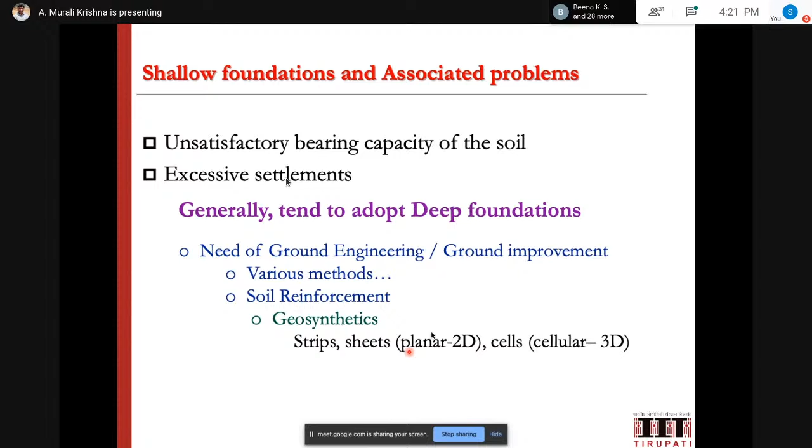We can see several instances in many places where soil reinforcement geosynthetics are being applied. When you talk about geosynthetics, there are different types: strip type reinforcement, sheet type reinforcement, and cellular type or 3D reinforcements.

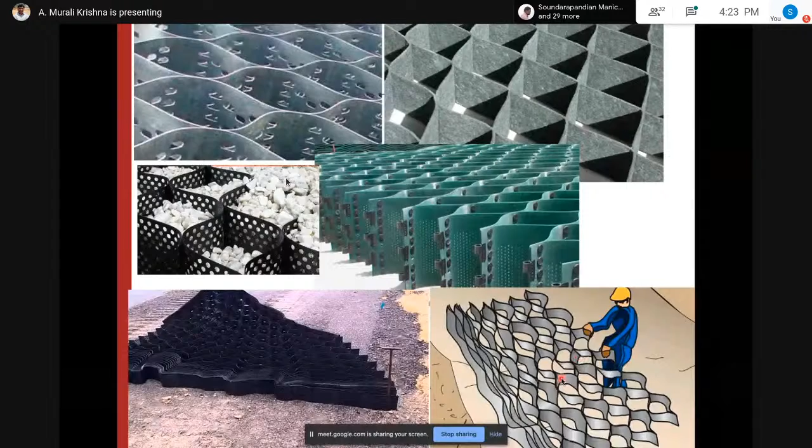These geocells can be brought to the site in a very collapsed form, which can then be extended and opened up, and filled with material to proceed with the construction.

Geocells can also be prepared using geogrid material like this one - these are unfilled ones that were prepared. This geocell is factory-made, directly bought and placed. These two, and the top two, are prepared on site.

The advantage of on-site preparation is that geocells can be prepared to any different sizes, particularly when we need to use them for very large areas. However, in the context of shallow foundations, mostly the readily available geocells would suffice the requirement.

Now, when we adopt reinforcing the foundation, what are the various options if you want to modify the foundations? Let us see here. Let us take a ground.

Hypothetically, I am taking a case of homogeneous clay or homogeneous ground. However, in practice, reality, the ground is not homogeneous - there are certain things that would be there. Another hypothetical case taken here is the surface foundation, otherwise generally we will be embedding the foundation to some depth - that is the practical thing. However, here, the homogeneous soil case and the foundation resting on the surface has been taken.

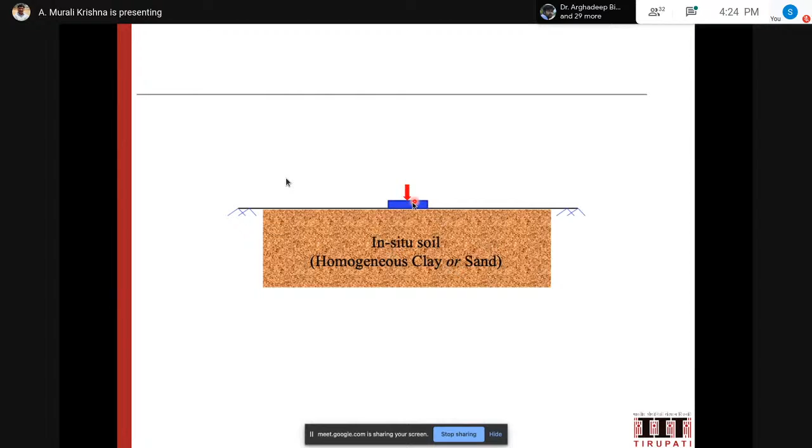Yes, this foundation soil system has some problem, and we need to improve the capacity. One option would be taking the top few meters or few centimeters of the soil and replacing it with other good quality soil, generally sand or other cohesionless material, or sometimes M sand or quarry dust. These can also be used to fill the top part of the soil.

So this can be a layered configuration and unreinforced, basically with no other reinforcement placed here. This is one type of configuration one can adopt to improve the capacity of the soil.

Otherwise, we can also include some layer of reinforcement in between at the interface, a single layer, or we can use multiple layers of reinforcement starting from the top to the bottom of the footing, coming down to the interface also. That is what more practically can be considered. But in this case, we are taking one planar reinforcement at the interface between the two materials as one option. The next option is to

use the three-dimensional geosynthetic material in the form of geocell, placing it directly at the interface. This is one more option one can consider for getting the advantage in the foundation.

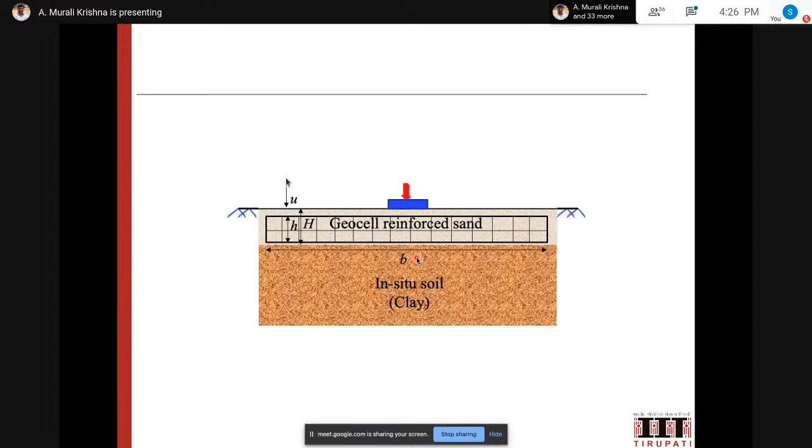Here, certain parameters are involved. So U is the top depth of the geocell from the surface, and small h is the thickness of the geocell. Capital H is the total thickness of the sand layer, the geocell reinforced sand thickness, and small b represents the total width of the foundation, which can be in proportion to the footing.

Another option is keeping the geogrid at the interface and placing the geocell over this geogrid. So these are various options one can adopt for improving the capacity of shallow foundations using different forms of geosynthetic reinforcement.

To observe the performance of these different model studies, experimental studies were conducted by Biswas, Arghadeep Biswas, who defended his thesis in 2016. A very thorough study has been done considering different types of subgrade soils, having undrained shear strength values of 7, 15, 30, and 60 kPa, and also a uniform sand of relative density 80%, with different reinforcing foundation configurations as discussed previously.

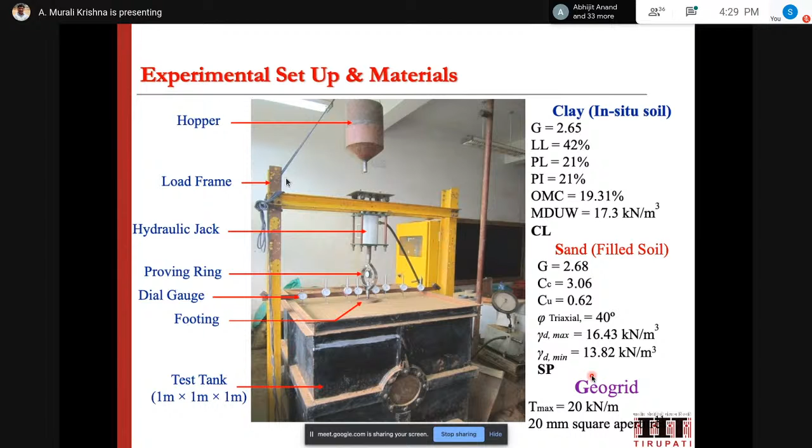As we saw earlier, the various materials used in the study were clay, having these properties, prepared at different undrained shear strength CU values, and sand material having these properties, prepared at 80% relative density. Geogrid was used as the geosynthetic material, used as planar reinforcement horizontally, and the same geogrid was also used to prepare the geocells, forming a three-dimensional geosynthetic material.

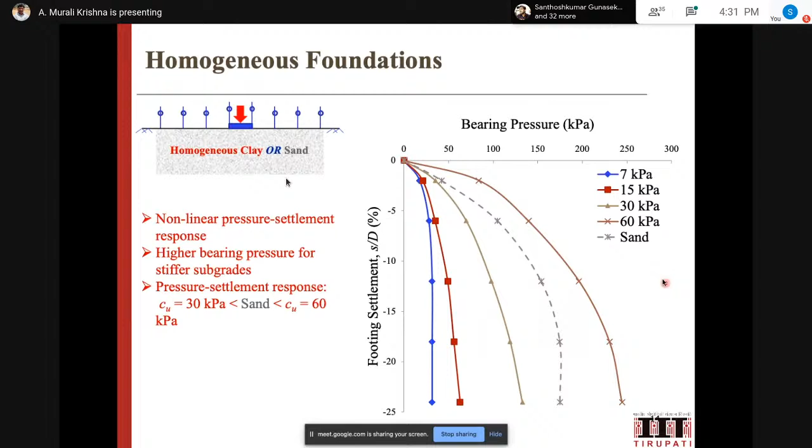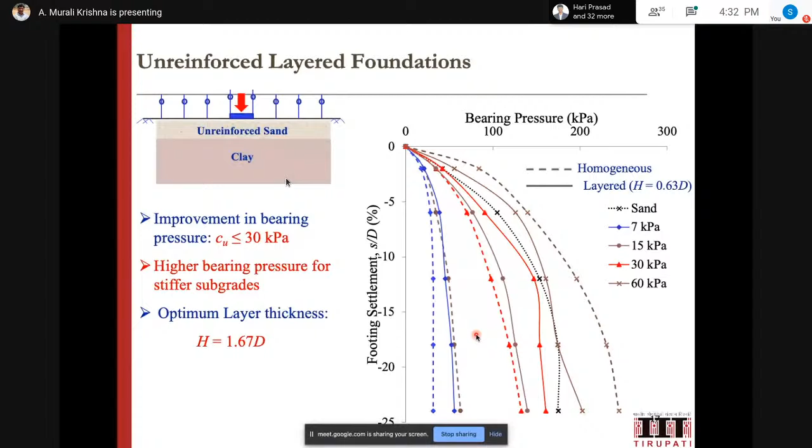Among these, we can clearly identify the increase in capacity for the very soft subgrade, here 7 kPa, and also for the 15 kPa subgrade significantly. The 15 kilopascal subgrade with the layered simple unreinforced sand has significantly contributed to the increase in bearing capacity. So these are some other heights of the sand layers.

However, for the 15 kilopascal case, even a nominal small thickness layer of 0.63 times the diameter also significantly increased the capacity, and further not much change up to about 12% settlement we can see here. This is one observation we can see. So what we can see is in moderately soft to medium stiff soils, even keeping a small layer of sand will significantly improve the bearing capacity.

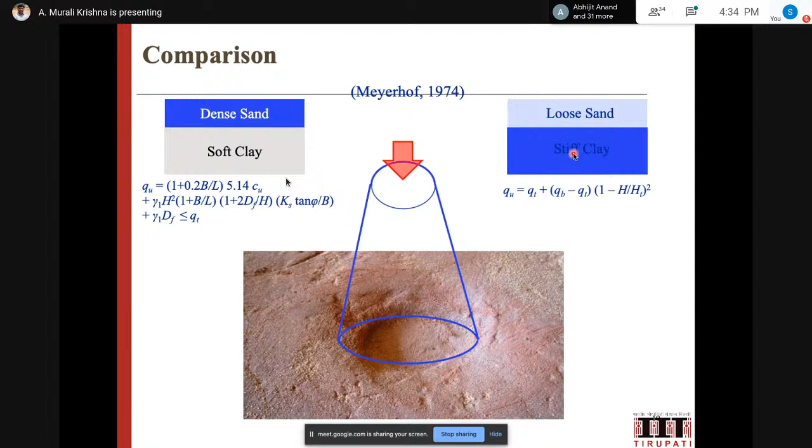Whereas in the other category, the top layer is loose sand compared to the stiff clay at the bottom. Loose sand here means it is relatively softer compared to the soil capacity, not actually loose. Using these equations, the foundation bearing capacities have been evaluated, and these are also reasonably comparable with the theoretical calculations.

So the next category of reinforcement is the geogrid reinforced category, which is one layer of geogrid placed at the interface, and keeping the same height of sand layers from 0.63 to 2.19, various tests have been done.

This is the unreinforced condition, meaning sand has been placed here but without reinforcement. With reinforcement, the capacity has been increased at 0.63 times the diameter depth. This is the significant improvement we can see here. The difference between these two lines clearly shows the contribution of the geogrid reinforcement in enhancing the reinforced foundation capacity.

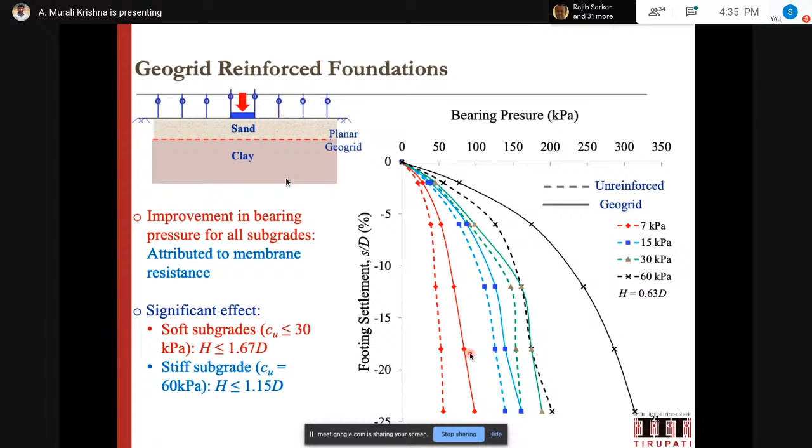This figure shows results for various Cu values, for example Cu 7 kPa, even Cu 60 kPa, with the sand bed and also the geogrid reinforcement at the interface. We can see significant improvement in the bearing capacity. Just to draw your attention here, even the very stiff subgrade of 60 kilopascals strength could get improvement when we use the geogrid at the interface. We can see that improvement also can be obtained.

The reinforcement mechanism in this case can be explained with reference to the membrane effect, which has been reported earlier by Love et al. and various other researchers who conducted studies. You can see here the depression penetration into the subgrade is minimized with the use of this geogrid. Using the theory proposed by Love et al., the capacity of the reinforced foundation is evaluated, which is also compared in this figure, and they match reasonably well.

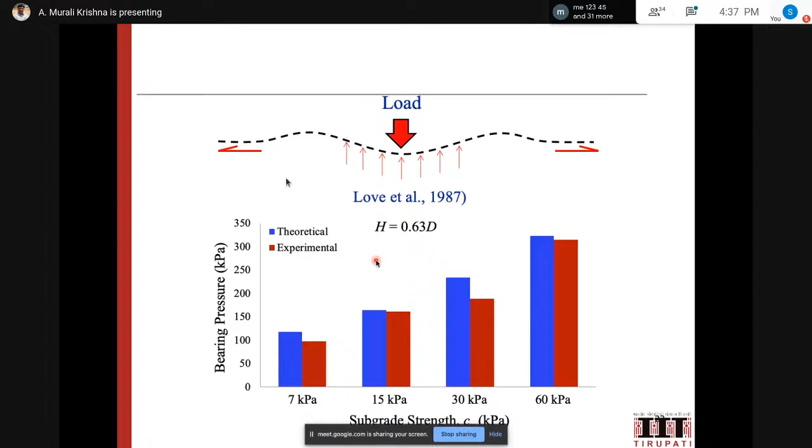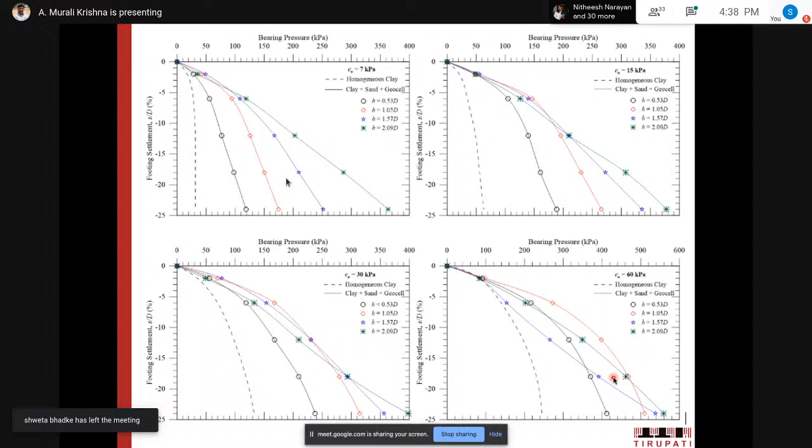For example, if you take the very soft clay subgrade, CU 7 kPa, the capacity has been increased many fold. Even in the case of the very stiff subgrade, using the geocell, a very significant improvement of almost 3 to 4 folds can easily be seen in this particular figure.

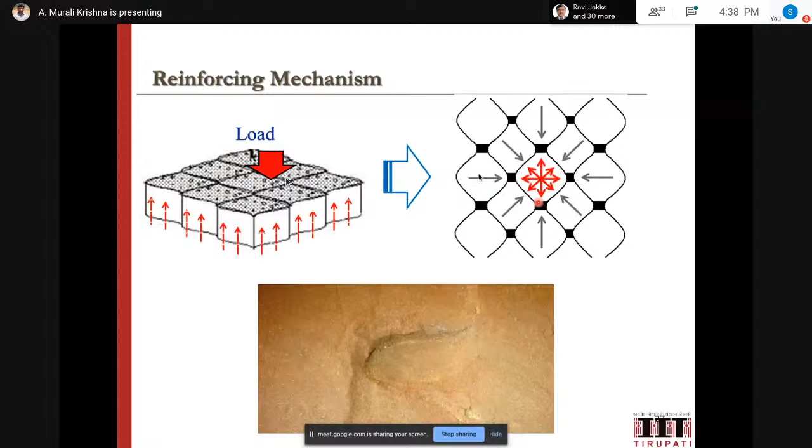The reason for the improvement and the mechanism are shown in this figure. Various mechanisms act together: the interaction between the soil and vertical walls of the geocell is one aspect, and the confinement of the geocell provides more resistance to the soil. Also, the membrane effect has been shown as a beam-like mechanism, where the whole geocell acts as a beam.

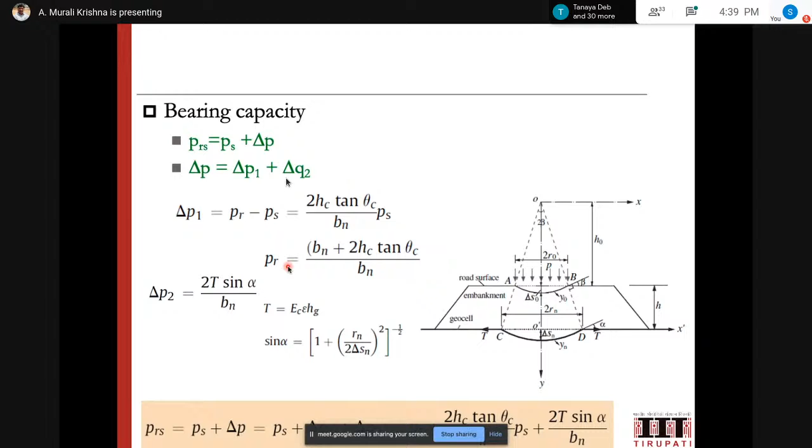So quantifying these effects analytically for calculating the bearing capacity, the studies by Zhang et al. significantly provided contributions and gave the formulations to calculate the bearing capacity, as shown in this figure, which can be used to calculate the capacity of the geocell reinforced foundation system.

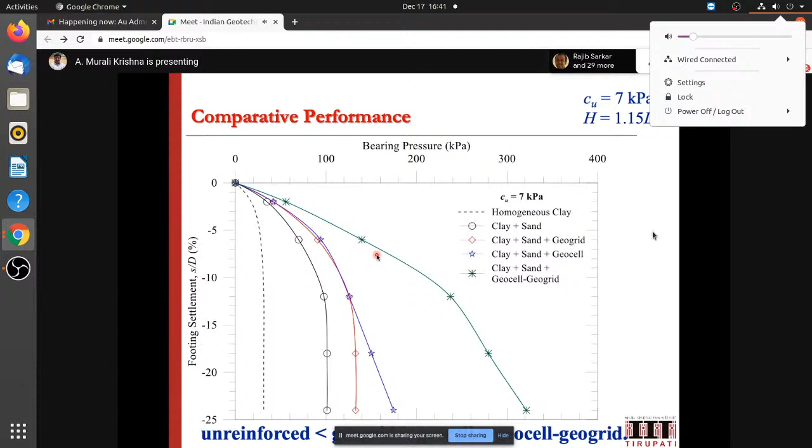For example, CU of 7 kPa, a very soft subgrade, has been taken, with H value of 1.15D, and different reinforcing configurations can be seen. This is homogeneous clay at the bottom, and this is only clay and sand. Even here you get significant improvement.

So only providing geocell or geogrid reinforcement directly on the sand could not make much difference up to 12% settlement. However, providing the geogrid and geocell together from the start of settlement significantly improved the performance. This is an important observation showing the superiority of this level of reinforcement. With geocell and geogrid together, you get significant improvement at all settlement levels.

On the other hand, for the other class of subgrade, 30 kilopascals, there is a significant increase beyond 6% settlement. So you could get the significant advantage of various forms of reinforcement clearly defined. This shows how performance can be improved as per requirement, depending on the subgrade strength of the soil.

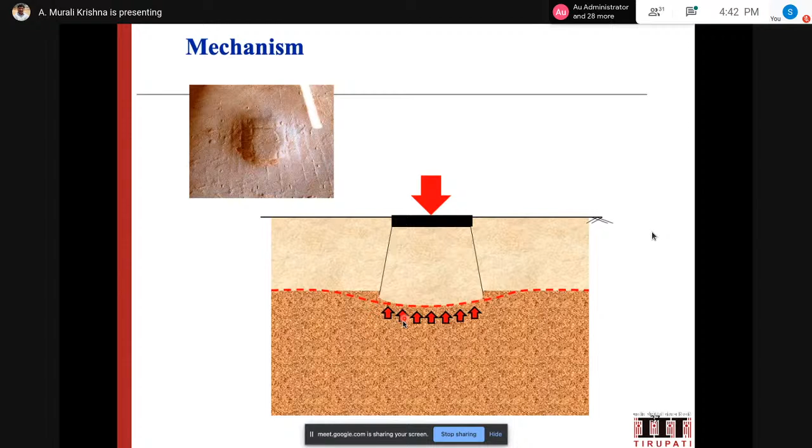Just to recall the various mechanisms altogether: in the layered configuration, you will have this type of behavior, and the depression and penetration can be expected at this level. These are particularly presented for the soft subgrade. If you provide geosynthetic reinforcement, you get the membrane effect, and penetration into the bottom soil can be minimized, giving more performance.

Next, using geocell reinforcement, you see all the mechanisms like membrane effect, beam-like mechanism, and confinement effects being used effectively. When you provide bottom reinforcement, it interlocks with the geogrid system, and there will be locking between the geocell and geogrid as well, giving much more improved performance. This is the interlocking mechanism that can be seen here.

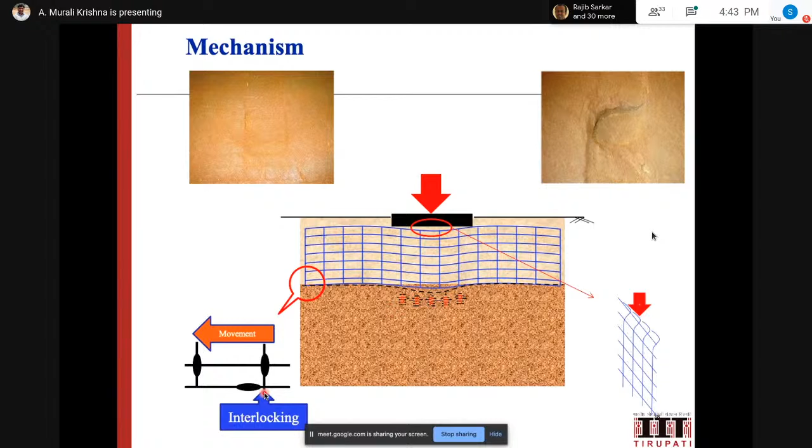So depending on the contributions, one can see different levels of improvement in the shallow reinforced systems. With that, I am coming to the concluding remarks.

This study showed geosynthetic reinforcement in any form is very effective in enhancing the foundation capacity. We can note that the geocell-geogrid combination provided the higher performance, with geogrid being the lowest among the reinforced configurations. In fact, unreinforced layered configuration also could improve the bearing capacity of the system. Overall, the whole improvement depends on the level of the footing settlement, the layer thickness we keep over the in-situ soil, and the strength of the subgrade in-situ soil.

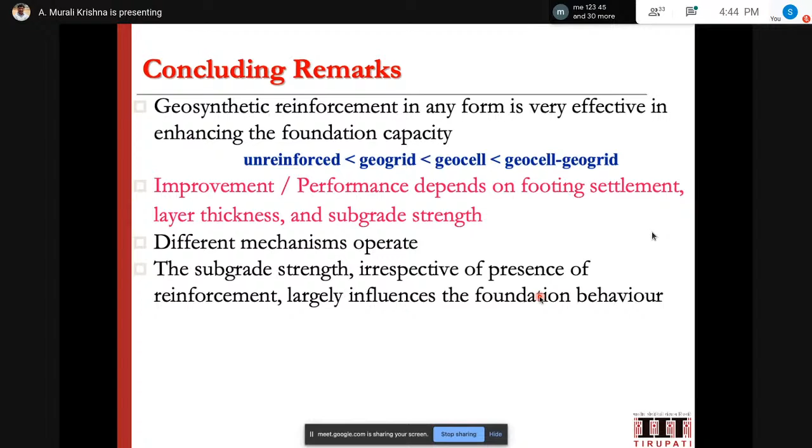It is to be noticed that improvement levels decreased with the increase in subgrade strength. However, in relative values, even stiffer subgrades having the reinforcement could contribute much improved bearing capacity. Considering all this improved performance, one should note that reinforced shallow foundations may provide an alternative solution to deep foundations under certain circumstances. It is not necessary to go for deep foundations if some of the performance requirements are not satisfying.

Using geosynthetic reinforced foundation under shallow conditions itself, we can meet the requirements. So with this, I thank you all for your patient learning. Thank you.

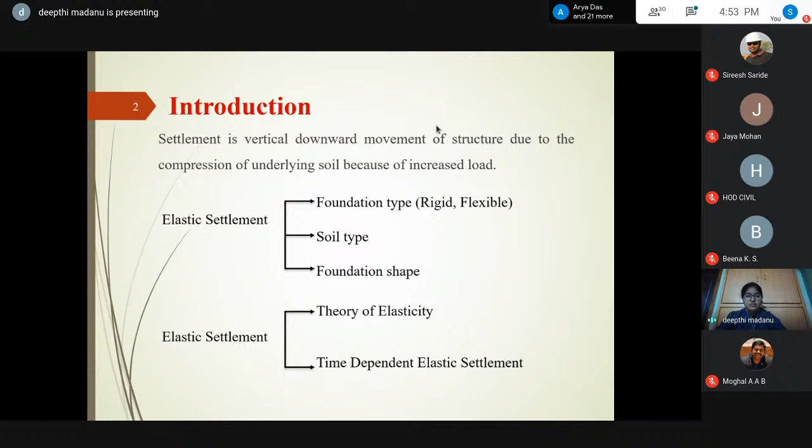The methodology is to find the settlement using the Schmertmann et al. method, and the Burland and Burbidge method, and to find the variability in settlements of soil considering three sizes of footing - 2, 4 and 10 meters - for a pressure of 100 kPa, and to define the suitable method for a given soil profile.

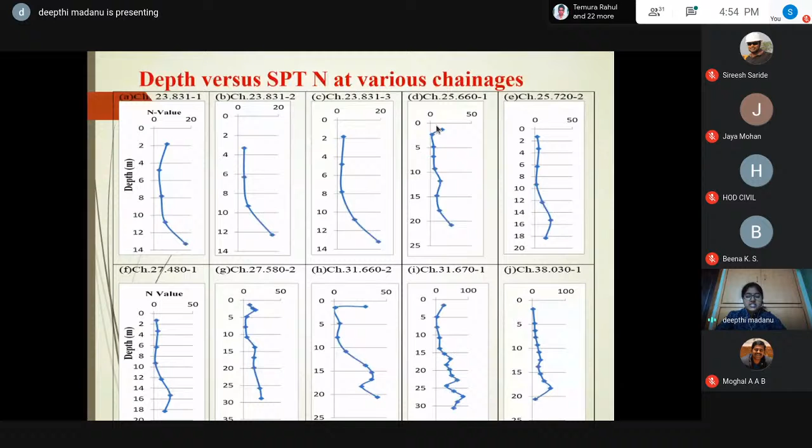I have considered the geotechnical investigation report at Dankuni Kharagpur section, which comprises 23 chainages. This is the borelog showing variation of SPT-N at various chainages. We can see the variation is constant up to a certain depth and then increases with depth, and for some other chainages it increases and decreases with depth.

The Schmertmann method is developed using strain measurements from literature and the theoretical solution of Ahlvin and Ulery, along with FEM analysis, to obtain the strain distribution triangle method. The formula to find settlement is C1 C2 Q sigma IZ by ES into ZI. Coming to the Burland and Burbidge method, it is developed based upon regression analysis of around 200 case histories.

First, to find the settlement, depth of influence needs to be determined. That depends upon whether the variation of SPT-N is increasing or decreasing with depth. If increasing, we can use case 1, that is Z dash equals 1.4B divided by B_R, power 0.75 into B_R. If decreasing with depth, then Z dash equals 2B or Z double dash, where Z double dash is the soft layer depth. Whichever is smaller, we use that condition.

The formula to find settlement is alpha 1, alpha 2, alpha 3, shape factor, width factor, and pressure factor, multiplied with reference width.

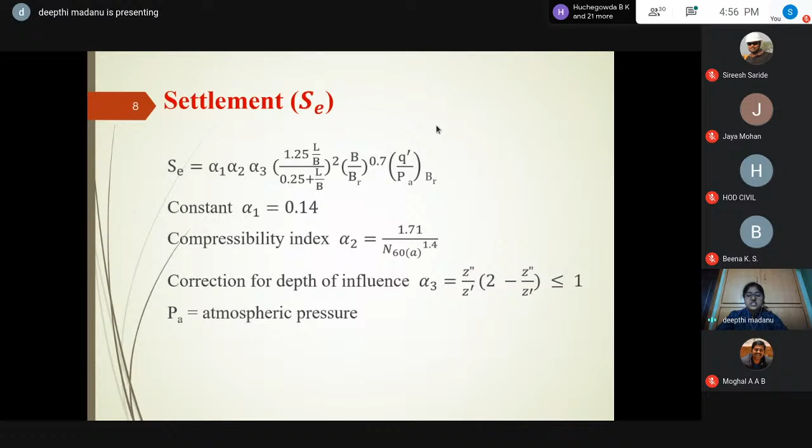These are Schmertmann's results. Based upon the deformation modulus, it is divided into different layers. These are the thickness of each layer and the SPT-N of that particular layer. After converting to qc, the relation I have used is 2N. Since the soil present is silty clay, to further convert to deformation modulus, I have used the relation 2.5 qc.

This is the strain influence factor at the center of each layer, and this is the ratio of influence factor to deformation modulus multiplied with the thickness. The summation of all layers, multiplied with depth correction factor and creep correction factor, gives the final settlement. This is for 2 meter footing width. Similarly, for 4 and 10 meter footing widths, these are the settlements.

Coming to Burland and Burbidge method, if the soil profile is not uniform, that is, if variation is increasing and decreasing with depth, it is difficult to finalize which case to consider. So what I have done is...

Can you rush to your conclusions please? We are running short on time.

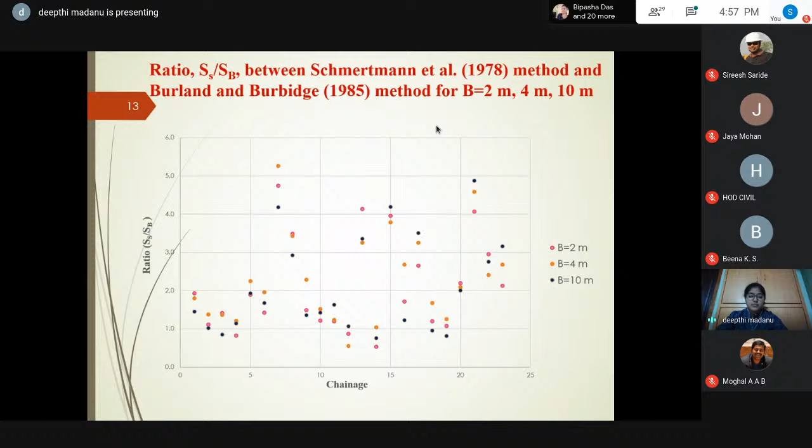So this is the graph obtained by considering various ratios at various stratas. We can see the ratio is greater than 1 at some stratas and shows a peak value greater than 3, because at these stratas SPT-N value is greater than 15, which implies higher values of N give higher settlements in Schmertmann's method. But in Burland and Burbidge method, higher values of N get averaged and predict lesser settlements. The ratio shows less than 1 at profiles where SPT-N value is very low, around 3 to 1, which implies smaller values of N do not affect Schmertmann's method, but are reflected in Burland and Burbidge method and give more settlements.

In general, Schmertmann's settlements are higher than Burland and Burbidge settlements. For footing width less than 4 meters, Burland and Burbidge method is more suitable if the soil profile is not uniform, and for footing width greater than 4 meters, Schmertmann's method is more suitable. The ratio shows a variation of up to 3 for stiff strata at shallow depths, and the ratio shows less than 1 for soft strata whose SPT-N value is less than 3.

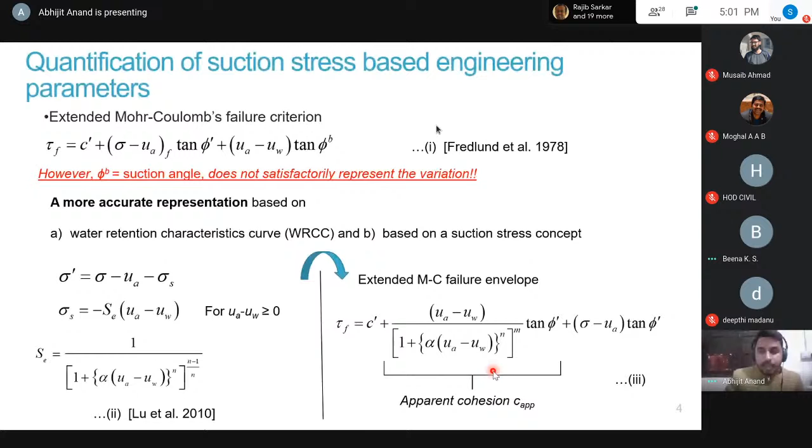Going further, when a steady state infiltration is taking place in the vertical direction, like infiltration or evaporation, the matric suction variation with depth does not remain constant. So what has been done in the present study is that the variation of this matric suction with depth has been incorporated by assuming a steady state infiltration rate ratio, which can be quantified as Q by Ks, where Ks is saturated hydraulic conductivity and Q is the magnitude of surface flux.

Once we are considering this steady state surface flux condition, the apparent cohesion does not remain constant. It becomes a function of depth and effective saturation. This saturation is a function of depth since effective unit weight is a function of degree of saturation, so it also does not remain constant. It becomes a function of depth. So in equations 5 and 6, you can see that the apparent cohesion is not constant. It is a function of the infiltration rate ratio and the depth, and similarly for effective unit weight as well.

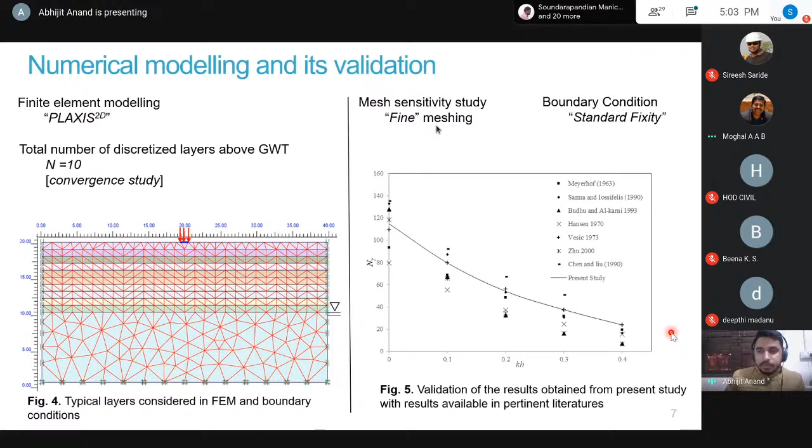Now coming back to the deterministic bearing capacity analysis, the seismic bearing capacity has been defined in terms of a dimensionless ratio. It is basically bearing capacity to gamma B, and analysis has been carried out considering 5 different infiltration rate ratios and 5 different horizontal seismic acceleration coefficient values.

Last minute. Yes, sir.

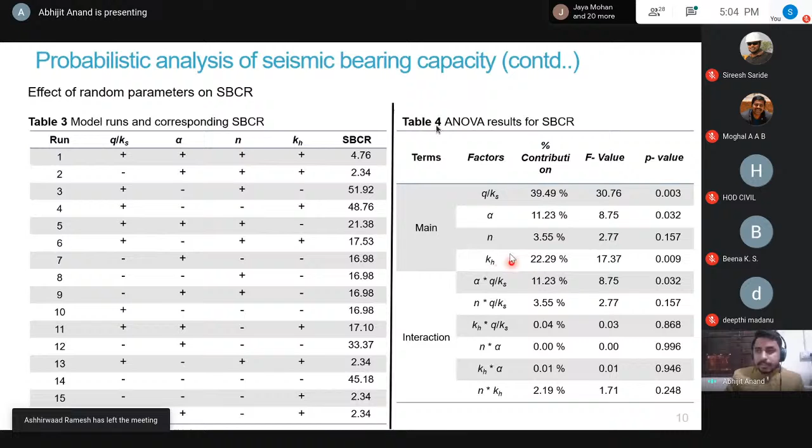Based on the uncertainty of the parameters, these are the ANOVA results. The point which is noteworthy here is that the factor infiltration rate ratio has a 40% percentage contribution, and the seismic acceleration coefficient value has 22% contribution on the overall seismic bearing capacity ratio.

It is a much more accurate representation of SBCR, seismic bearing capacity ratio, and the unsaturated fitting parameters like alpha and n have also been incorporated in the analysis.

Now, to conclude, the first and major highlight of the present study is that matric suction substantially affects the seismic bearing capacity ratio under one-dimensional steady state surface flux boundary condition. This has been the major outcome of this particular presented study.

Under deterministic analysis, the reduction of SBCR with KH is a very obvious result - the seismic bearing capacity was found to be reducing with increasing KH value.

However, among all the random input parameters, Q by KS was found to have the highest contribution to the seismic bearing capacity ratio. Also, the water retention characteristic parameters alpha and n had comparatively lesser contribution to the overall seismic bearing capacity ratio.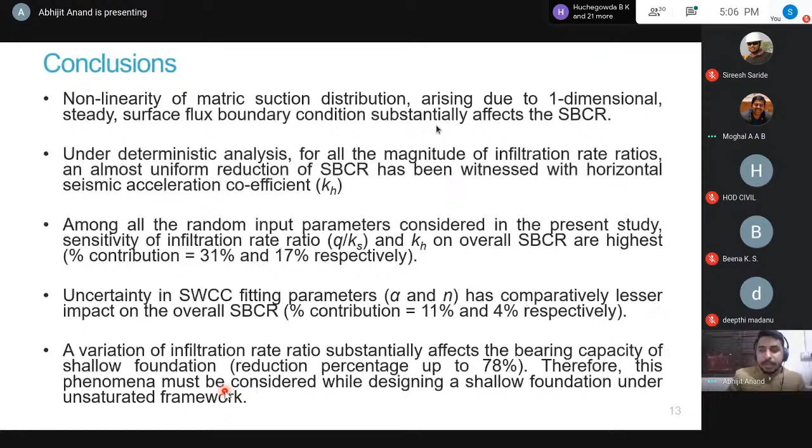And finally, to conclude my presentation, it has been found out that Q by KS has a substantial effect on the bearing capacity and has to be considered while designing a shallow foundation. These are the findings. Thank you.

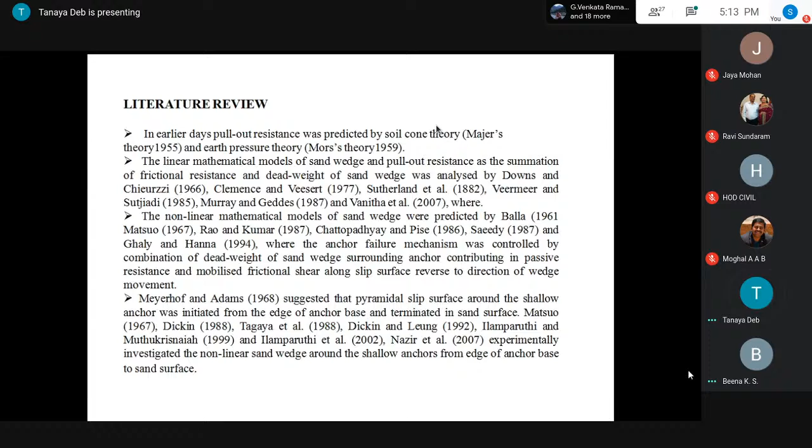This is the presentation of 1G 2D bell anchor panel under vertical pull in dyed and non-dyed dry sand deposit.

A 2D bell anchor panel possessing a bell angle base alpha, base diameter dB, and shaft diameter ds is embedded in dyed and non-dyed dry sand deposits. Under vertical pull, as applied stresses act along the vertical plane of the panel, a couple of symmetric non-linear failure surfaces are formed on both sides of each panel. These failure surfaces are generated from the anchor base and terminate at the sand surface.

For mathematical realization, these slip surfaces can be interpreted as three-dimensional axisymmetric failure surfaces in the same scale. Here, the intention is to find out the value of predicted pull-out capacity.

This study attempts to investigate the predicted values of pull-out resistance, ratio of mobilized frictional shear to pull-out resistance, and ratio of dead weight of sand to pull-out resistance of bell anchors on account of variation in embedment ratios, diameter ratios, and bell angles.

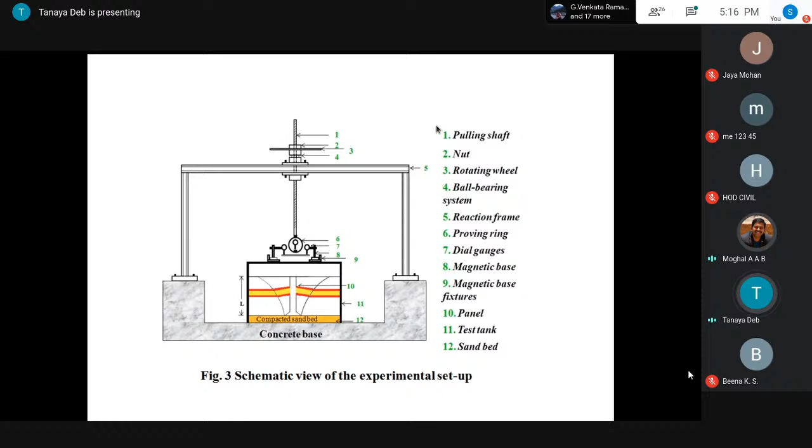This is the presentation of failure surface on both sides of the panel, and this is the total mathematical process. From here I can draw the conclusion: with the increase of embedment ratio, pull-out resistance is gradually increased.

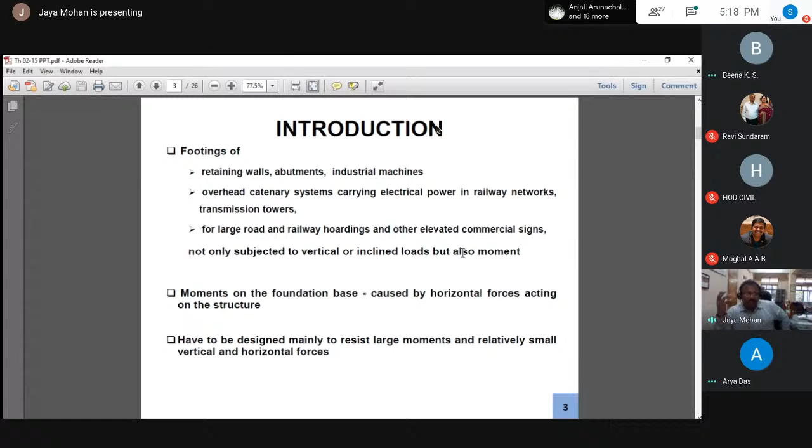Now coming to the introduction, you see some foundations. Usually we are aware of foundations which resist vertical loads. But in certain structures, rather than vertical loads, moments will be the deciding criteria. Compared to vertical loads, moments will be much larger, as in the case of foundations for transmission towers or foundations for retaining walls, etc.

In this research, we are trying to find out the influence of moment on the load settlement behavior of a foundation. Usually wherever in the foundation moments are the deciding criteria, the type of foundation provided may be either a short pier foundation or a pile foundation. These type of foundations are quite costly.

So we are trying to find out the influence of moment on the load settlement behavior of a shallow foundation, and also on various geometric parameters. So these are the objectives: influence of moment on the load settlement behavior, influence of depth of foundation on the rotation of footing, and influence of vertical load on the foundation on the rotation of footing. Also, if you provide a reinforced foundation bed, how much improvement we can achieve. These are our research objectives.

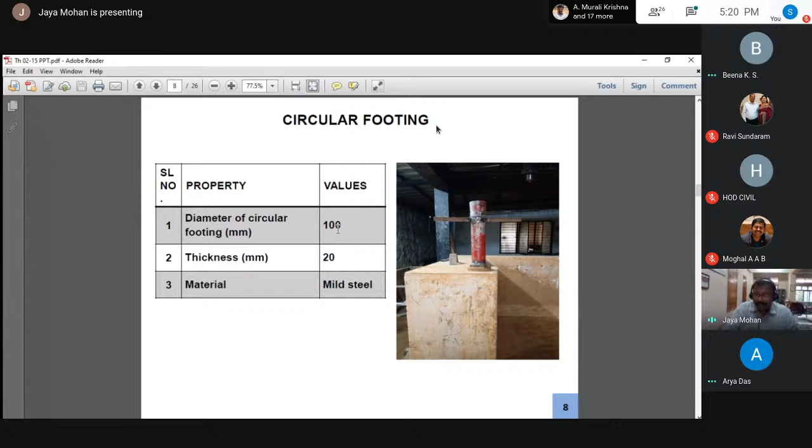This is a circular footing, and this is the loading arm. This is a test tank. Diameter of the circular model footing was 100 millimeter, and thickness was 20 mm. Material was mild steel. For the reinforced foundation bed, we use this manufactured sand.

This is the setup, this is a schematic diagram. Through one jack, we applied the vertical load on the foundation. Through an eccentric jack, we applied the vertical load, which created an additional load plus moment. This is the model circular footing, and the settlements on both sides were measured using dial gauges of 0.01 millimeter sensitivity.

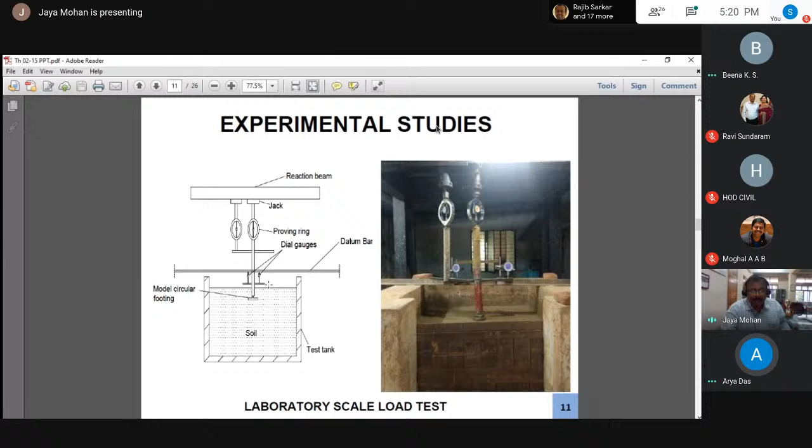This is the photograph of the setup. The moment is applied, and one load was applied concentrically, and there was an eccentric load with an eccentricity of about 245 millimeter. The eccentric load is P2, concentric load is P1, and the diameter of footing is 100 millimeter. These are the various parameters.

We varied the vertical load on the foundation, the concentric load we varied, we also increased the moment, we varied the depth of foundation, and we varied the thickness of foundation bed. So these are the parameters varied.

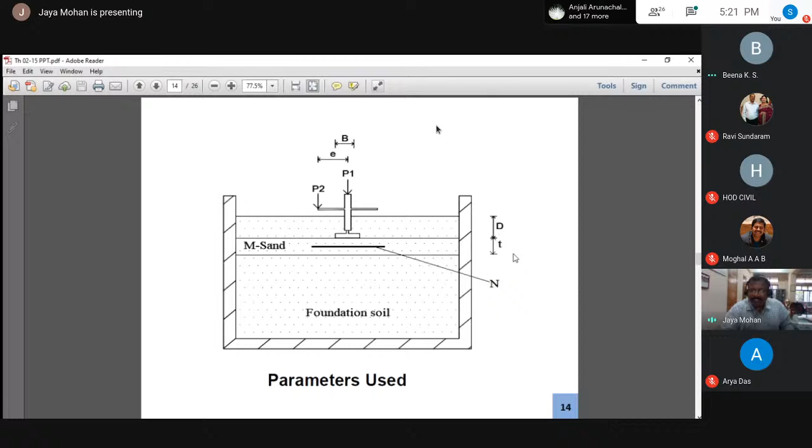For modeling soil, we use the Mohr-Coulomb model. Since it is a circular footing, we use an axisymmetric model to model the system, and for discretization we used 15 node triangular elements. There was the interface element to find out the contact pressure distribution between footing and soil.

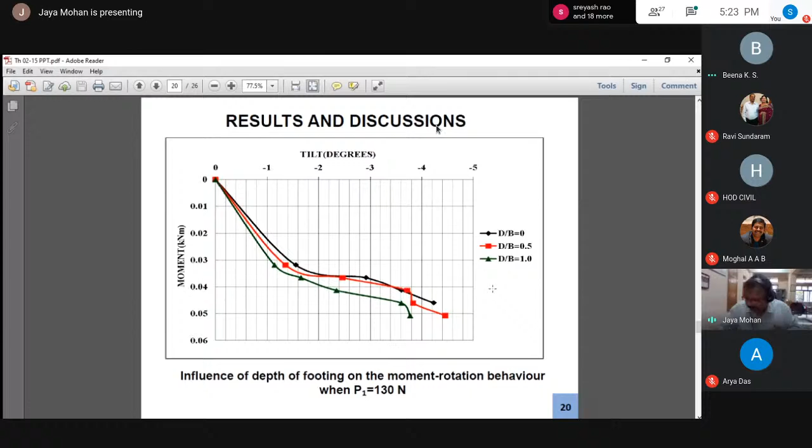Sir, Jaya Mohan, time is running out. Okay, you have another presentation to make. Yeah, of course, then please.

This is the effect of moment. As the moment increases, the load settlement behavior changes - as the moment increases, the settlement increases.

This is the effect of depth of foundation. As the depth increases, the settlement reduces.

This is the effect of reinforcement. This is without reinforcement, and these are with foundation but without reinforcement. These are with reinforcement - blue is for single layer and brown for double layer. But with an additional layer, there was no much improvement. With the thickness of foundation bed, there was a bit of improvement.

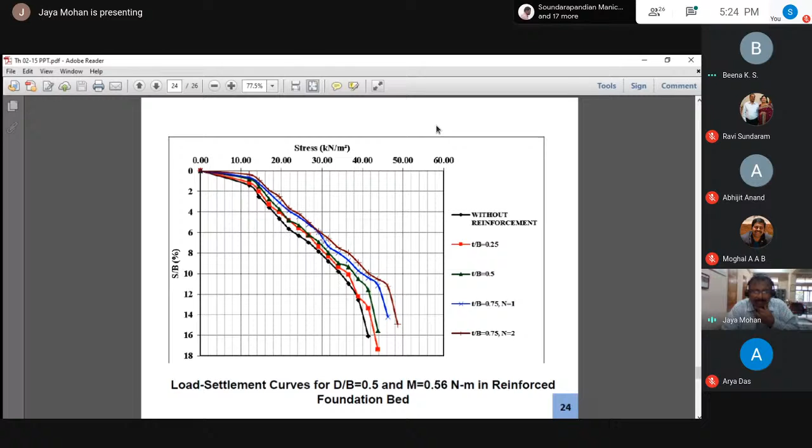These are the conclusions. The depth of embedment reduces tilt and settlement. Moment influences the load settlement. With the increase in vertical load up to a particular limit, the tilt increases, but after a particular value of vertical load, the tilt reduces. That's what we found. Thank you.

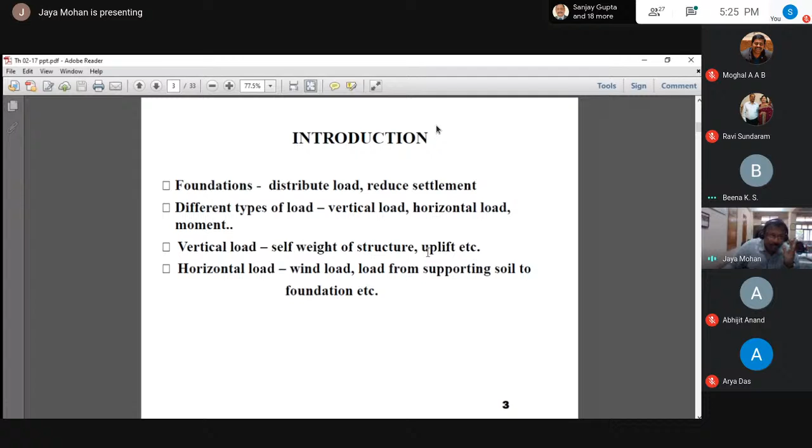For foundations where horizontal load is a deciding criteria, we wanted to investigate the horizontal load versus horizontal deformation behavior. That is the main objective here. There are some parameters - influence of depth of foundation and influence of vertical load on the horizontal deformation and tilt. And of course, we tried to minimize horizontal deformation by providing micropiles.

These are the materials used. We used laterite soil, and the model footing was circular. These are the properties of soil. These are micropiles - steel rods having diameter 3 millimeter and length 150 mm.

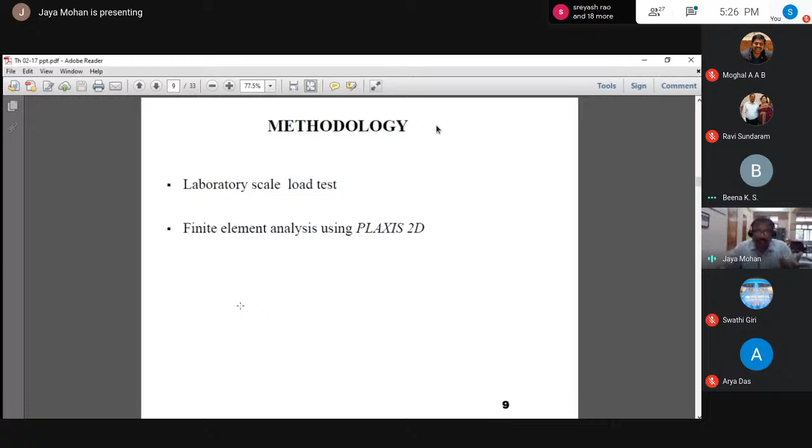This is the same circular footing, and the methodology was the same. We did laboratory scale load test and finite element method analysis using Plaxis 2D. This is the schematic diagram - we applied vertical load using a jack, and we had a reaction on the side. We applied horizontal load also using a jack, so both vertical deformation and horizontal deformation were measured. There was a datum bar, both horizontal and vertical.

This is the setup - this is the arrangement for applying vertical load, and this is the arrangement for applying lateral load. And of course, these are the parameters.

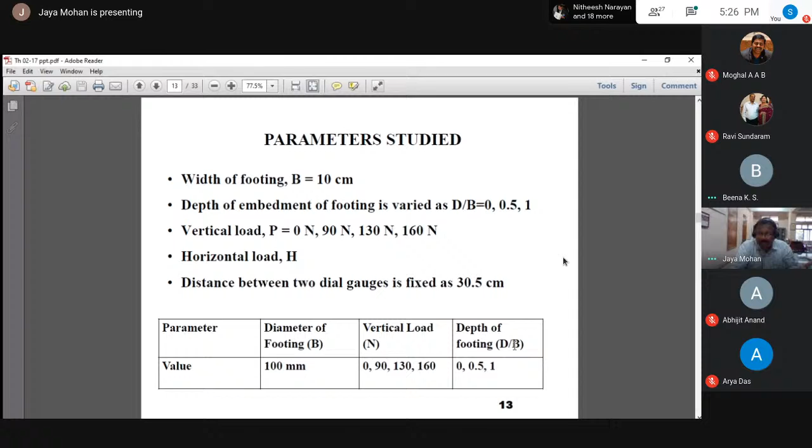These are the vertical loads applied. These are the depth of footing - we varied the depth of footing also, d by b, where d is the depth of footing and b is the diameter of footing. So 3 values of depth of footing.

This is a schematic diagram. Here we apply the vertical load, here we apply the horizontal load. There was a jack here, a proving ring. I hope you can see the rod - this rod was connected to the foundation. At the top of foundation, you can see the same rod here. Through this rod, just above the foundation, the horizontal load was applied. You can see the lateral deformation of footing here - there was tilt as well as lateral deformation. These are the micropiles.

Now again, we did finite element analysis using Plaxis 2D. These are the typical curves. This is the typical stress distribution.

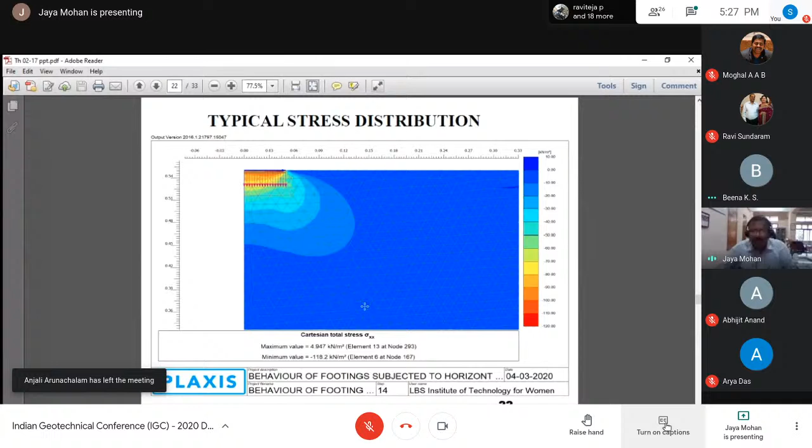Now coming to the results - when the vertical load was 0, the lateral deformation was maximum when the vertical load was less. As we increase the vertical load, lateral deformation reduces, because as we increase the vertical load, the normal stress increases, base friction increases, so the lateral resistance also increases.

This is the influence of depth of foundation. As we increase the depth of foundation, the confining depth also increases and lateral deformation reduced.

Now here, this is the effect of lateral load and depth of foundation on the rotation. You can see the rotation increases only up to a particular value of lateral load. After a particular lateral load, we have the lateral deformation, and the rotation ceases, except for d by b 0.5. That's one observation we made. And once you place micropiles - this curve is for without micropiles.

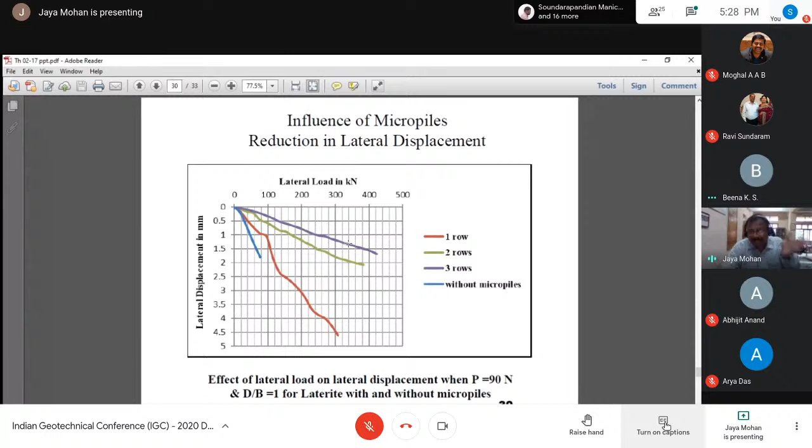By the addition of micropiles, we can reduce the lateral deformation up to a large extent. Similarly, rotation also - by adding micropiles, we can reduce rotation also.

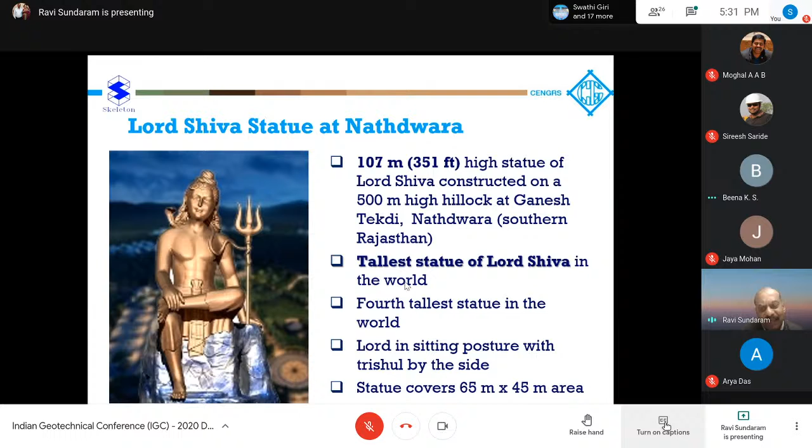Thank you for giving me the opportunity to present this presentation. It's slightly different from the kind of presentations made earlier - I will be talking about a unique high-rise statue. This is the statue of Lord Shiva at Nathdwara. This image is an architect's visualization of how the statue was to be made. It's a 107-meter high statue constructed on a 500-meter high hillock in Nathdwara. It is the tallest statue of Lord Shiva in the world and the fourth tallest statue in the world. Here you see the Lord in sitting posture with a trishul by its side. The statue covers a base area of 65 meters by 45 meters.

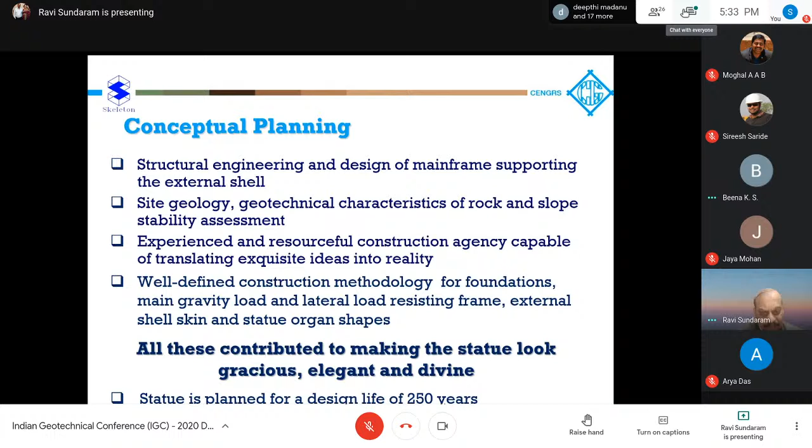The conceptual planning included structural engineering and design of the main frame supporting the external shell, and then the site geology, geotechnical characteristics of the rock, and slope stability assessment was done. An experienced and resourceful construction agency capable of translating the exquisite ideas into reality is most important. A well-defined construction methodology for foundations, main gravity load and lateral load resisting frame, external shell, the skin and organ shapes were all planned meticulously. All these contributed to making the statue look gracious, elegant, and divine. The statue is planned for a design life of 250 years.

So let us see what the implementation steps were. First, a mock-up of the statue was made. Then geological and geotechnical investigations were done, and a hill slope stability was assessed. Then the foundation design, and of course the rock anchors, were provided. The posture, expressions, visualizations and body proportions were done by an expert sculptor. In-situ casting of concrete using full-scale molds, including 3D modeling, was done, and a jointless 20,000 square meter concrete skin was poured and integrated into the structural steel frame, and then wind tunnel testing was done. This presentation is limited to the geotechnical aspects of the project.

Going to the geology and geomorphology, rock deposits in the area belong to the Nathdwara group. Formations belong to the Middle Proterozoic age, comprising quartzites, phyllites, calcareous phyllites, and bands of dolomite and calcitic marble. The topography is hilly and undulating. The general trend of the hill is north-south with inclined steep dips. It's in a semi-arid area, traversed by numerous nalas, with hardly any flow in these nalas except during monsoons.

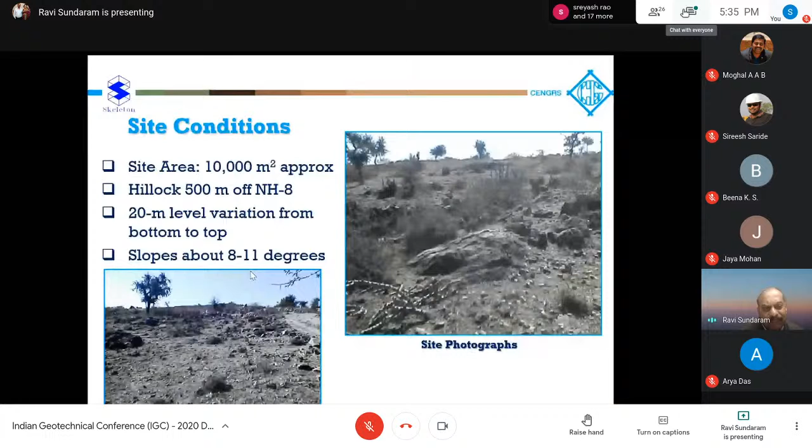The site area is approximately 10,000 square meters, and the hillock height is about 500 meters off the national highway, with a 20-meter level variation between the bottom and the top. So it's a gentle slope as such, 8 to 11 degrees.

These are some of the borehole data. You can see the recoveries and RQD values on the left side of the bore log.

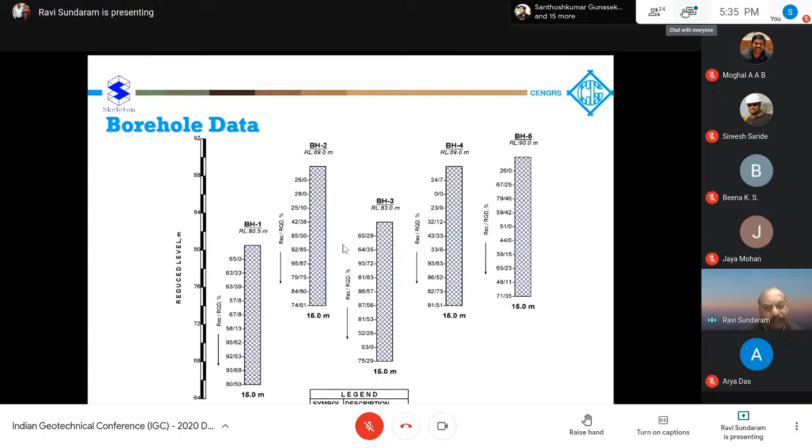A slope stability assessment was done. As per the visual assessment, the hill slopes are fairly stable. Rock is exposed at the ground surface. The slopes within the plot and surrounding areas are not too steep, 8 to 11 degrees. Slope failure in the slip failure mode or block failure mode is unlikely. Below 3 to 4 meter depth, the rock mass has widely spaced joints.

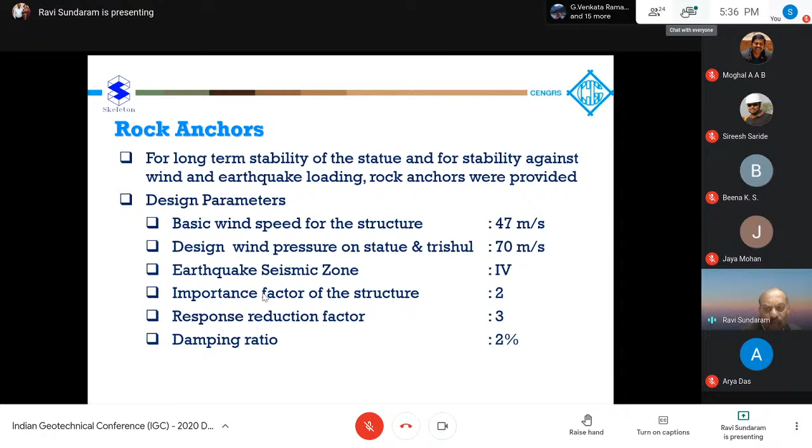Rock anchors were designed to support the statue for long-term stability against wind and earthquake loading. These are the parameters used for the design of the rock anchors. It's an earthquake zone 4. 8 meter long anchors, embedded 7 meters into the rock and 1 meter into the raft foundation, have been provided.

The anchors were installed in 100 mm diameter drilled holes with Fe 500, 32 mm TMT bars grouted into the rock. The anchors were designed to resist the entire lateral force due to wind and earthquake, ignoring the friction resistance between rock and concrete.

Sir, the time is running also. Please, sir. Yes, sir, I'm finishing in a minute or so.

The slope protection measures include proper drainage, shoulder drains, and where rock has been excavated, adequate precautions were taken. Concrete paving extending 1.5 meter beyond the exterior foundation was provided, and of course the rock anchors.

This is the structure and construction. There is an internal space with a lift for maintenance and monitoring purposes. Some internal floors are for public use and museum. The steel members are designed to provide flexibility, and the external skin has been specially poured using fiberglass bolts.

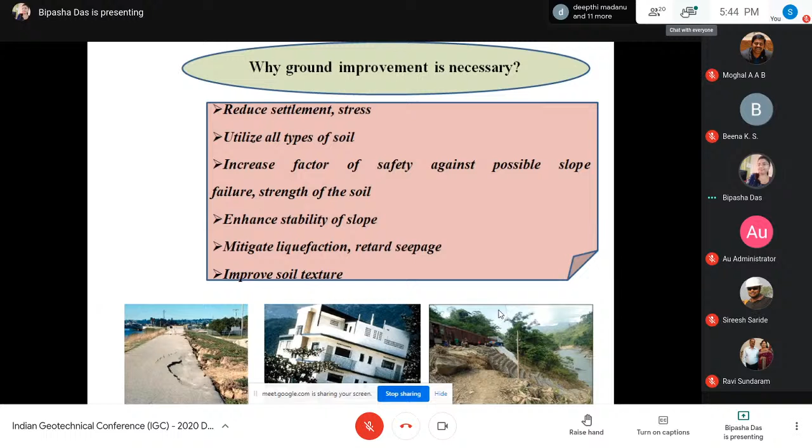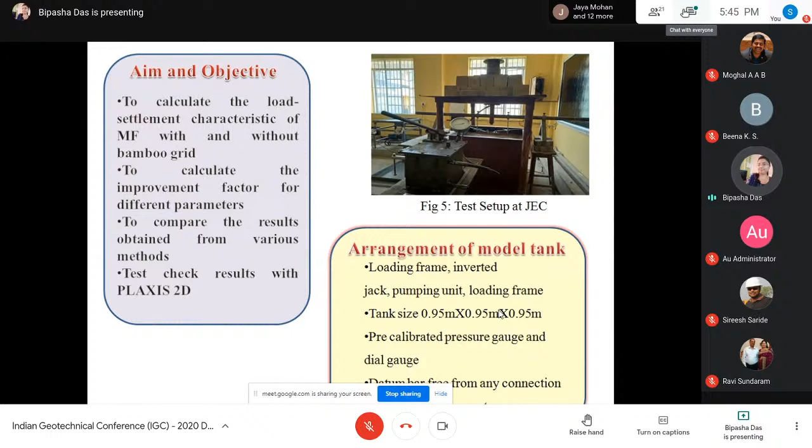Can you hear me now? Yes, you can. The test setup is present in Jorhat Engineering College, where I completed my MTech. Materials used are sand, steel plate, and bamboo, which is procured from RFRI Jorhat. These are a few data from the lab.

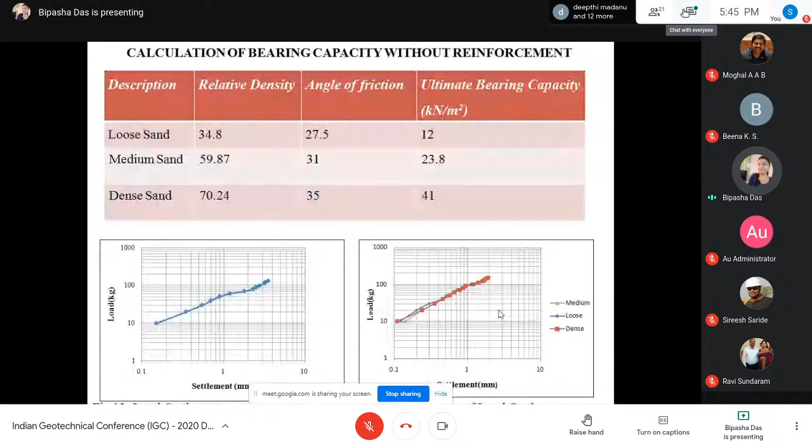IS 1888:1982 is used thoroughly during the project. When bearing capacity was calculated experimentally, it is obtained that bearing capacity increases with relative density. But when calculated theoretically, maximum bearing capacity is obtained in Meyerhof, followed by Plaxis, and the least in Hansen, irrespective of angle of friction and relative density.

Plaxis 2D is a finite element method which is used with a 15-noded axisymmetrical model. The following properties are inputted during analysis. The bearing capacity is obtained from the load displacement curve.

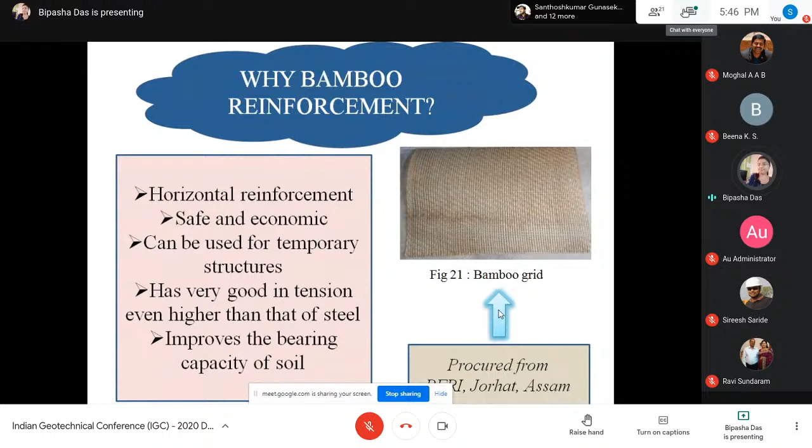For reinforcing, bamboo is used, which is easily available in the northeastern region. These are the following benefits of bamboo, but being a natural source, it needs treatment. CCB is the best method. Square apertured and hexagonal apertured bamboo grids are placed at required depth and bearing capacities are obtained. The improvement factor decreases with increase in the difference of depth between footing and bamboo layer.

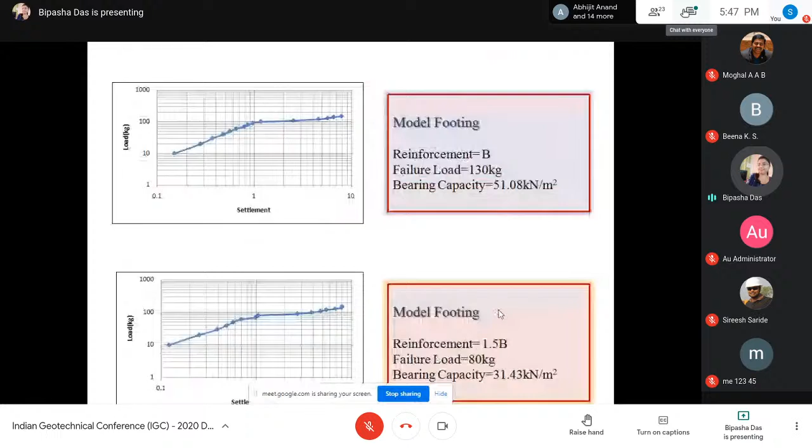Similarly, the analysis was conducted in Plaxis with bamboo features. These are the following results. Effect of number of layers of bamboo grid with Plaxis 2D is also analyzed. Aperture plays an important role. Bearing resistance offered by HBG, that is hexagonal aperture, is more than square aperture.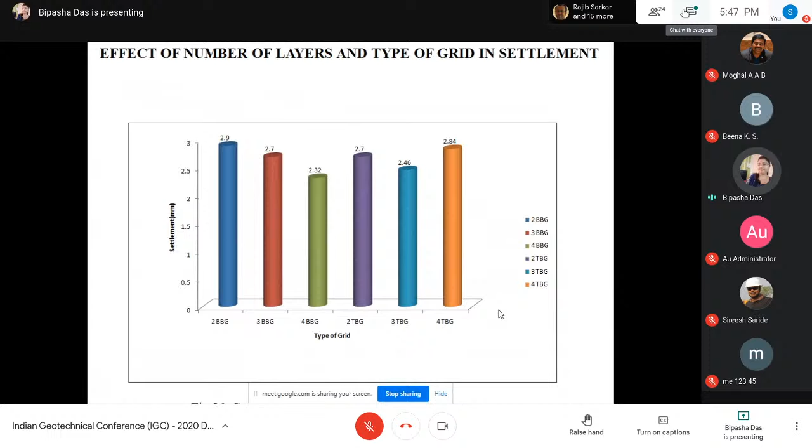Settlement with three layers of hexagonal is more than four layers of square aperture. Bearing capacity is also more with three layers of hexagonal. These are the few conclusions and future scope which can be done in later stages. And these are the few references used during this experiment and during my project. So, thank you.

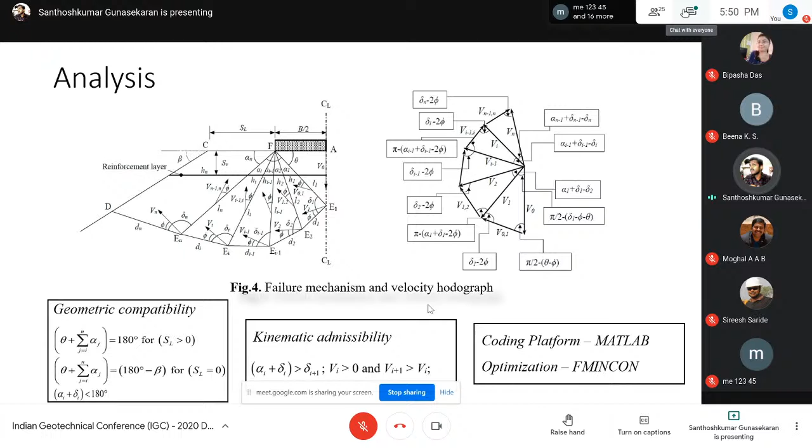In order to impose this upper bound limit theorem on this particular problem, this failure mechanism has to be geometrically compatible and kinematically admissible, so it has to satisfy these constraints. By satisfying these constraints, the algorithm has been written in MATLAB and the optimization has been carried out using the fmincon solver. Now the bearing capacity can be expressed as given in equation 1.

Due to shortage of time, I'm not explaining all these things. Now the results are presented in terms of two factors: the increment factor, which tells us the effect of reinforcement in the embankment, and the influence factor, which tells us the influence of the sloping ground in the analysis.

Now this figure shows the collapse mechanism obtained in this method. Here you can see with the increase in the friction angle, the extent of the failure zone is also increasing.

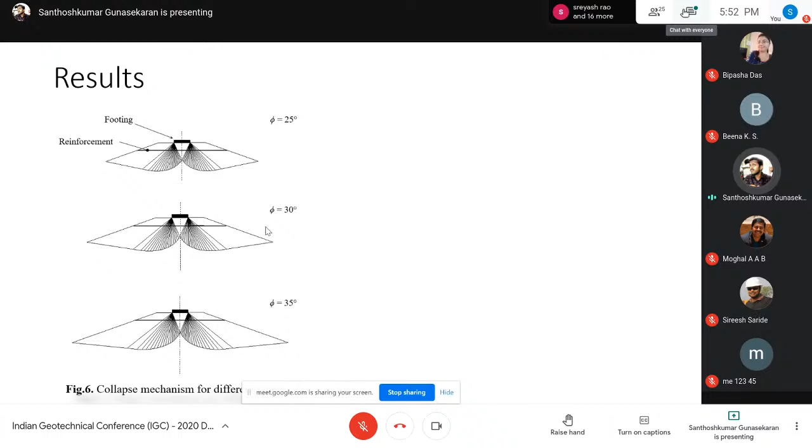Coming to the conclusions, the ultimate bearing capacity is calculated using upper bound limit analysis, and the effect of slope and reinforcement is expressed in terms of two different factors. What we observed is that the influence of the friction angle and the sloping angle is greater compared to the cohesion and the setback distance. The present results are found to match reasonably well with the results reported in the literature. Thank you, due to shortage of time I have to rush.

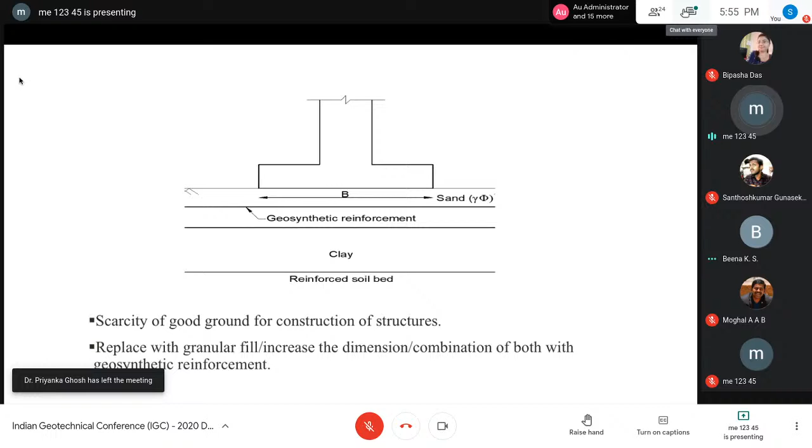Due to the scarcity of ground for construction of structures, due to globalization and industrialization, we are compelled to use ground with low bearing capacity and more swelling nature. The industry's practice is to replace with granular fill up to the width of the foundation, or increase the dimension, or a combination of both with geosynthetic reinforcement.

My objective of study is to develop a method for estimating the bearing capacity and non-linear response of soil bed reinforced with inclined reinforcement over in-situ clay layer, considering kinematics, and a parametric study to quantify the effect of various parameters on the bearing capacity of CNS soil bed with inclined reinforcement over in-situ clay.

For the literature review, we have majorly used Meyerhof's and Madhav's papers, extended. Meyerhof's punching shear failure model for thin dense sand bed on clay is extended to include axial tension in inclined reinforcement. For additional bond resistance mobilized due to transverse deformation of inclined reinforcement, the theory proposed by Umashankar and Madhav is used.

For methodology, a strip footing of width B rests on a thin sand bed overlying clay. Here we have used CNS soil to make a profile. The cohesion of the CNS soil is neglected, and phi is considered. Reinforcement is placed at a depth of U from the bottom of the footing.

Punching shear failure of the footing is considered due to the self-weight of the structure. The soil column beneath the footing moves along with the footing, and due to that, reinforcement will also go down. Due to the movement of reinforcement, upward normal forces act on the bottom surface of the reinforcement, and with the movement of the soil column, shear stresses develop on either side of the soil column.

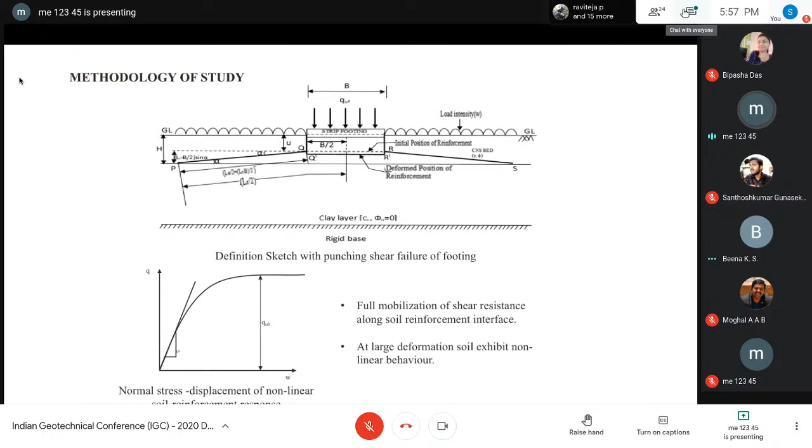Generally, reinforced structures allow more deformation before failure. With more deformation, it behaves in a non-linear manner. That's why we have considered here a non-linear soil-reinforcement response.

Due to this, the overburden stress consists of two components, QT and QN, resolved according to the inclination of reinforcement, and shear stress develops on both sides of the soil column. Due to the inclination of reinforcement, axial pull-out resistance is offered directly by QT, while QN is the normal stress, giving QN tan phi r.

So the total mobilized pull-out resistance is the combination of QN tan phi r and QT Lei. Due to the upward normal stress, tension is mobilized in the reinforcement.

We have used normalized bearing capacity to apply over a wide area. Here T star N is the normalized tension developed in the reinforcement, and T star N is the normalized transfer force obtained from Madhav and Umashankar.

Parametric studies were done for H by B of 0.5, phi of 30, phi r by phi of 0.75, and the deformation rate of the footing and reinforcement of 0.01, with variation of alpha from 0 to 20 degrees, gamma B by C from 0.9 to 3.6, LR by B from 2.5 to 3.5, beta separate fill factor from 0 to 3000, and stiffness factor mu from 500 to 10000.

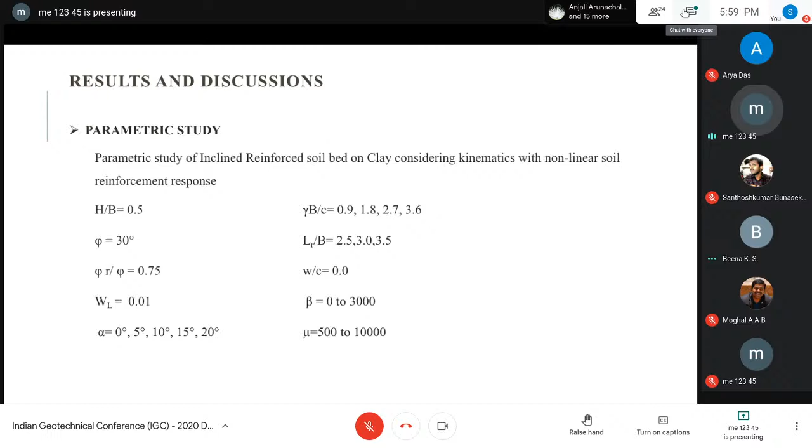Due to the inclination of reinforcement, the normalized bearing capacity increased by 42%. This is because additional normal stress acts on the reinforcement, leading to additional frictional resistance, and due to transverse deformation of reinforcement, additional bond resistance would be developed.

So there is an increment of 42% here due to the inclination of reinforcement, and due to the increase of mu from 500 to 10,000, there is an increase of 19% in bearing capacity.

This is due to the stiffness of soil. Due to stiffness of soil, additional normal force is required, and due to this, bearing capacity would be increased.